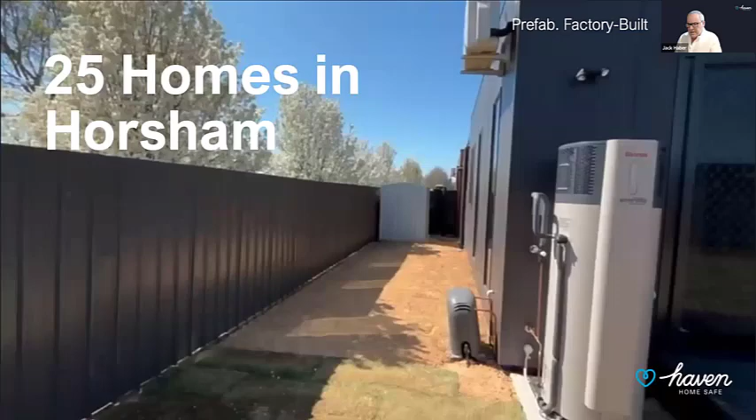We chose prefab for a number of reasons. With a funding commitment and a permitted site, our challenge was procurement. In Horsham, there's really only one local builder in the area with the capability of delivering a 25-house project.

We decided to go to tender and look at the options available to us, which was modular or traditional construction. We went to 3 modular, and 3 traditional builders, and modular won hands down. Tender prices were spread by 28% between the top and the bottom tenderer, or the most expensive and cheapest.

Interestingly, not all manufacturing modular providers are cheaper. Oddly, the most expensive and the cheapest tenderers were both modular. We awarded the contract to ARKIT on price and capability.

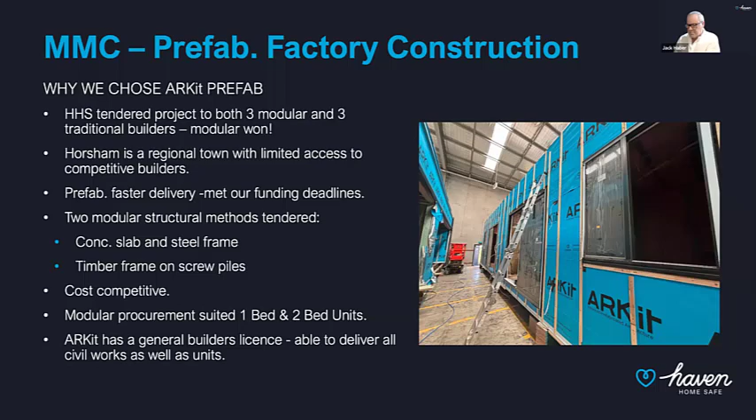So from an ESG value chain perspective, why did we choose modular? And particularly ARKIT, they brought architect design capabilities. They met our ESG requirements with a timber frame solution, and I'll go into this more later on in this presentation, bringing environmental benefits.

Their production methodology enabled them to produce up to 8 modules simultaneously in the factory. And their system was they build in batches, they deliver to site, and then they go on to the next batch.

With the modules fully completed in the factory, one of the issues facing prefab generally is proving to your funding body, whether it's a bank or in our case, a government funder, that you can verify the ownership of all the kit of parts that goes into a modular build. We were able to solve that problem with ARKIT and solve it to the satisfaction of Homes Victoria. So that was very important to us.

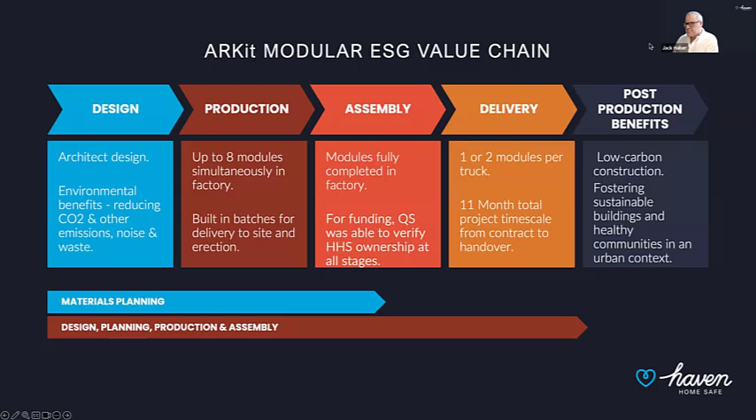So the first is a reduction in overall waste. Waste, as you probably know, is a big problem in construction. And these results demonstrate from a University of New South Wales study of multiple builders, both traditional and modular, that there are significant savings in waste with a modular build.

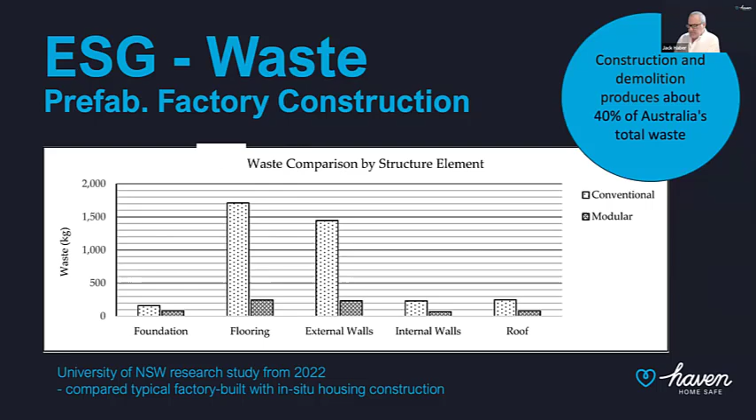The second is the carbon benefit. So a little bit of my perspective on carbon and construction. We're in a world where CO2 emissions are already affecting global economic and human security. With unchecked CO2 emissions driving climate change, the threat is to our national economy and raises the cost globally of disaster response, as we've seen recently, and fuels migration crises and conflicts.

In Australia, a survey in 2023 showed that 71% of Australians to be fairly or very concerned about climate change. But if you go to any pub and ask somebody there, they'll say, no worries, mate, just another day in paradise, because that's the Australian way.

My perspective is that we need to develop a sense of urgency because, as Bill Gates said, it's one of the most urgent and most complex problems the world faces, and we need to act quickly to avoid the worst possible outcomes.

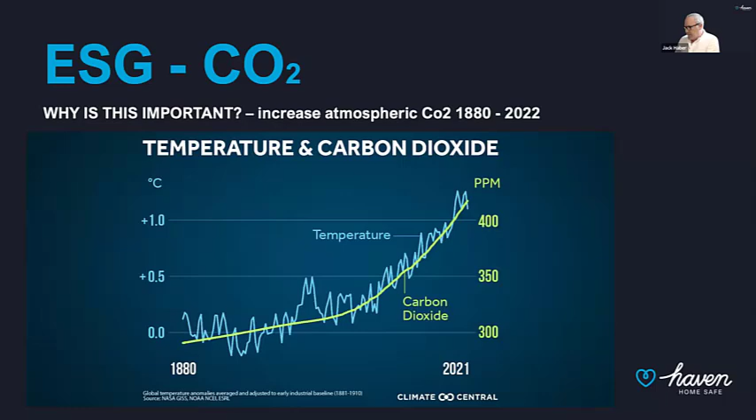In terms of construction and CO2 globally, you can split the construction component of global CO2 emissions into two. There are the operational benefits of the energy use in buildings over the building's lifespan, and there's the energy and emissions involved in the construction of the building itself.

So what's the difference and how does that affect the choices that we make? Well, it's really a time impact. If 11% of emissions from building construction come from embodied carbon, why should we focus on it? And the reason is because of the time frame.

The carbon released into the atmosphere, if you make better materiality choices, you're affecting a time frame within the frame of the construction itself. So it's a direct and immediate benefit environmentally, whereas operational emissions, the oven you choose, the dishwasher you choose, the refrigerator you choose, or the building itself and the insulation and so forth, the building lifespan might be 50 years or more.

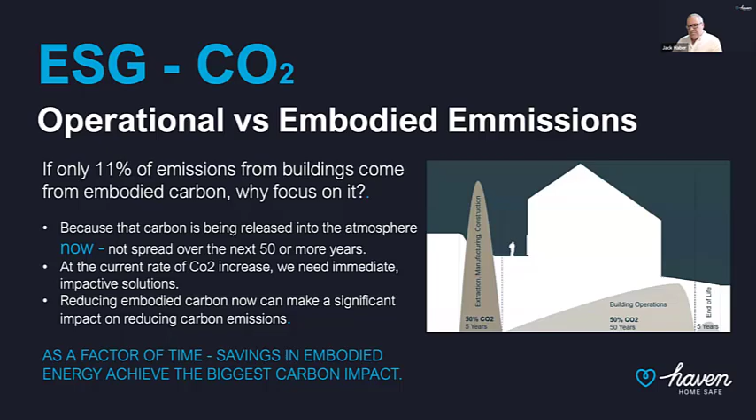So we did a study together with an environmental consultant called Ark Resources. And we basically studied two cases. The as-built design, which was a timber frame modular building on screw piles. And we compared it to one of the other tenderers, which was a waffle slab with steel purlins as the frame.

And what we said to our consultant was, we want you to compare and contrast the two construction systems, frame only. In other words, we've limited it to just the structural frame. Everything else, the cladding, the linings, the flooring, everything else being equal. But how impactful would a timber frame building be against a steel and concrete building in terms of carbon emissions?

And this shows the results. So the second line, the total of a timber frame was 5 times less, 5.5 times less than the carbon impact of a steel and concrete building. And remember, this was just focused on one of our units, one of 25 units.

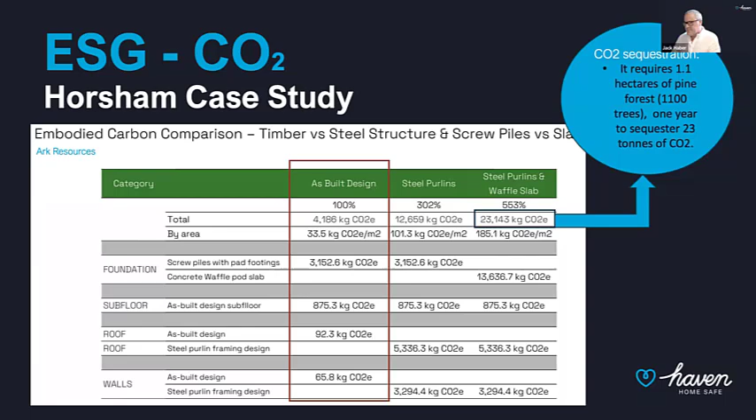So for 25 homes, timber frame on screw piles versus a steel and concrete build, the equivalent carbon differential between the two is 475 round-trip flights between London and New York. It's very significant.

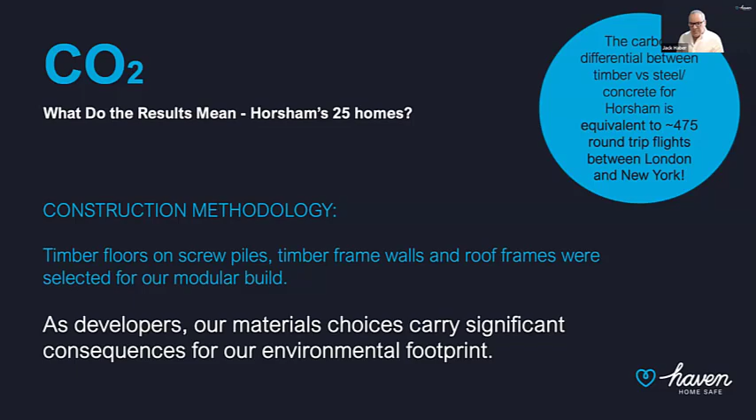My point is that the choices we make as developers, designers, and builders carry very significant consequences to our environmental footprint, and those consequences are encapsulated within a short time frame during the build. If we all made environmentally sustainable choices with embodied emissions, we could have an enormous impact on carbon in our environment.

So talking about timber applications more generally in construction, I believe that compared to other building typologies, Class 1 and Class 2 residential projects, which require relatively short floor spans, mostly between 4 and 6 meters, and relatively low live loads compared to offices or schools, engineered timber structures bring environmental and cost benefits, but they also bring excellent structural benefits, and they're more than capable of coping with a wide variety of housing typologies.

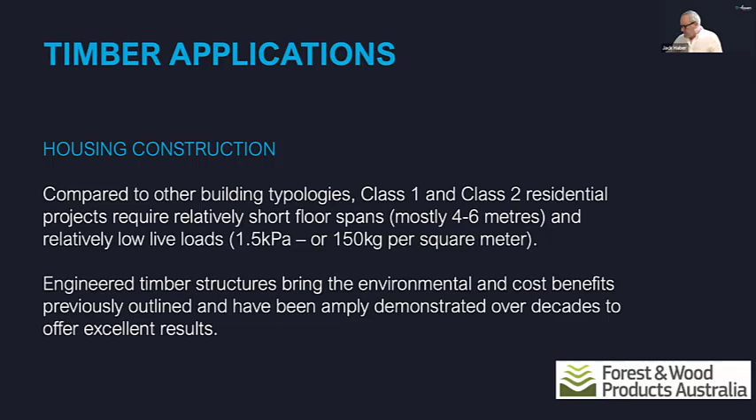So whether it's a vertical extension, timber brings lower weight, which is often what's necessary to create developments in a building's air rights. As an architect, I acknowledge that steel and concrete are essential to many projects, but for residential, whether it's vertical air rights or mid-rise, timber is a sensible and sustainable choice and brings both cost and environmental benefits.

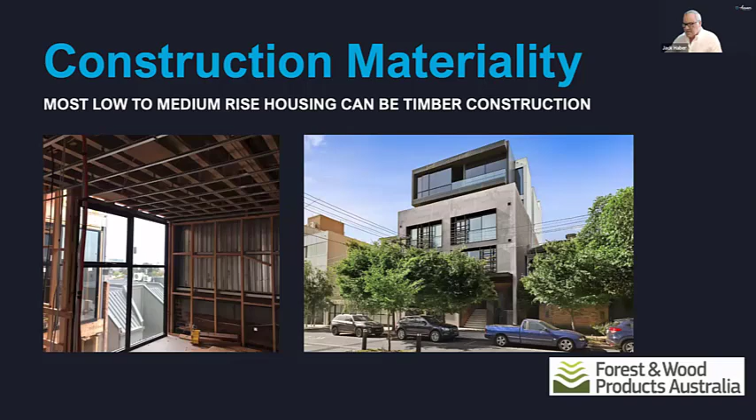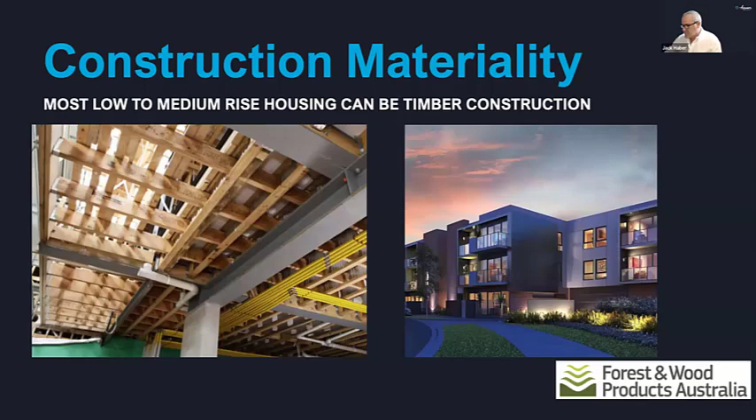Another project — most housing that goes up can and should, in my view, be built in timber. Steel may be required as a structural element, but if one considers a hybrid frame, in most cases the choice of using timber will save tons and tons of carbon and will also save money on most projects. It's an easy choice to make. Timber construction is well understood, well supported and supplied, and it's a choice that we as developers and designers can make that has a real impact.

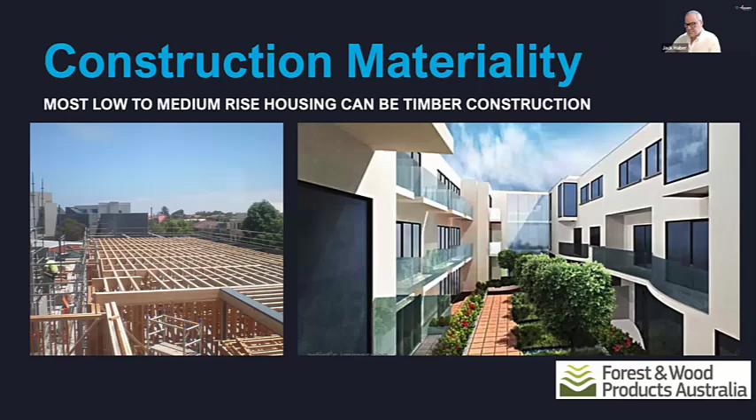Like any construction system, timber requires careful engineering and detailing. For Class 2 buildings in particular, of course, one has to deal with fire, acoustics, cladding and services design. And it's really important, therefore, to have consultants who understand how timber goes together and how to meet all the requirements and get the results that timber can bring.

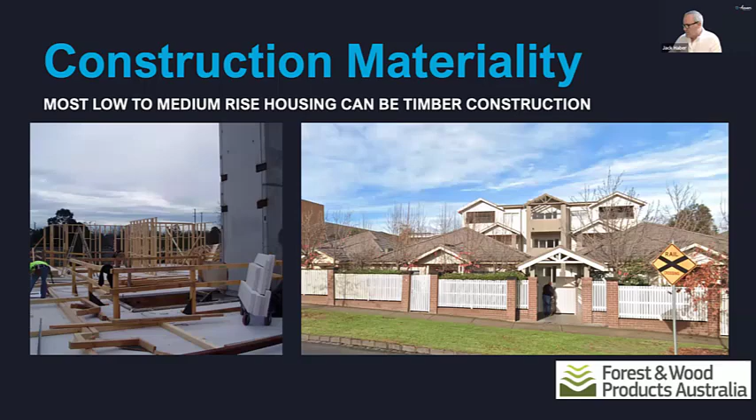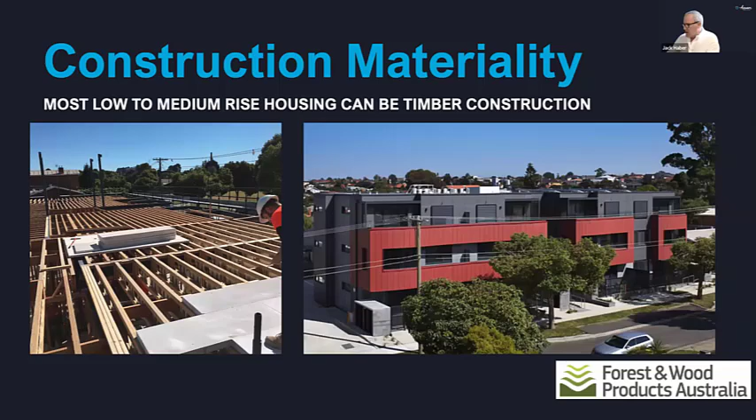But if due consideration is paid to the particular requirements of a timber system, one can achieve highly successful results, often saving time because of the ability for timber to be built in components in a factory and to be brought to site as a kit of parts.

This particular building, for example, was completed in 2014. Interestingly, a lot of opinion surrounds the use of timber in construction, and people often say, well, what about shrinkage? What about water? What about fire? The building's not as valuable or not as sustainable from a usage point of view, an operational point of view, as a concrete building. This particular building proved the lie to those claims.

As a demonstration of the timber structure's long-term value, specific interviews were conducted with the building managers of this building who took over when handover occurred, and the interviews were conducted 10 years after handover. The managers reported better overall performance for the building than many of their concrete frame buildings, with no issues whatsoever with the timber structure. In fact, their on-site managers had no idea that the building had a timber frame.

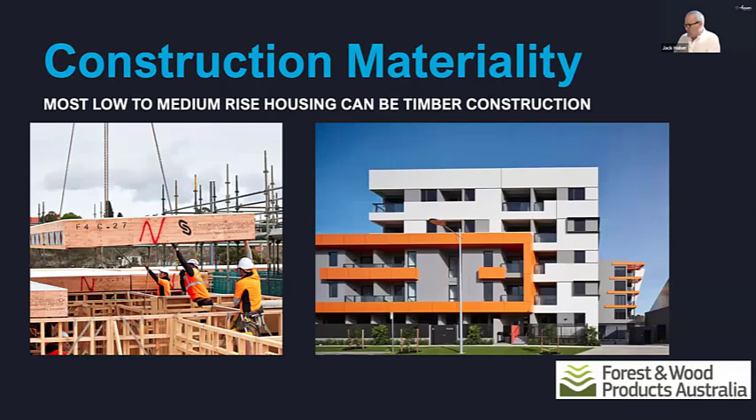So my message to any of you who are designers or developers or builders is that our collective decisions as design and construct professionals can have an enormous potential environmental impact and should be in our list of considerations when we make our materiality choices.

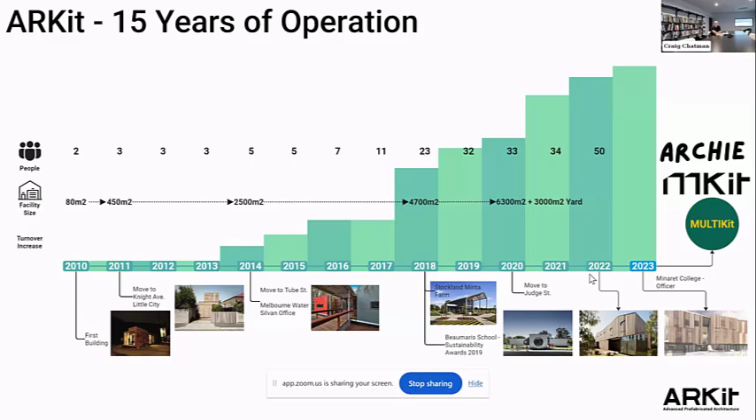Some of the client pool and architects we've worked with—although we are architects and have in-house architects working here—there are important learnings and offerings we can offer others, so we don't exclusively build all of our own projects. These are some of the clients we've worked with, both local and state agencies, as well as community housing providers.

In our manufacturing facility, our workshop and studio, we're based in Sunshine. Anybody here is welcome anytime, and we have our in-house designers as well as people that facilitate the construction, so site managers, project managers, construction managers, as well as full-time carpenters.

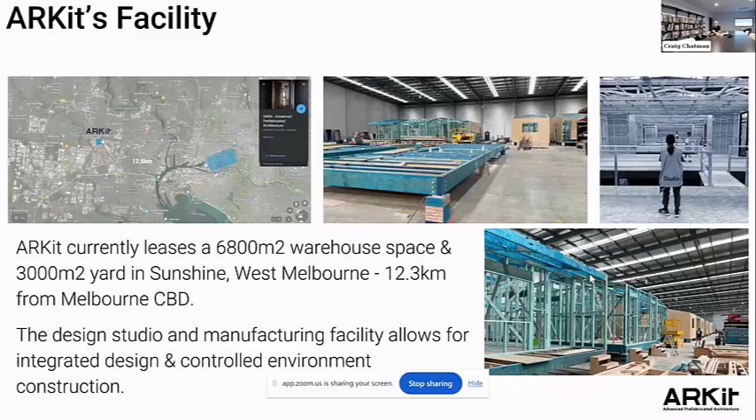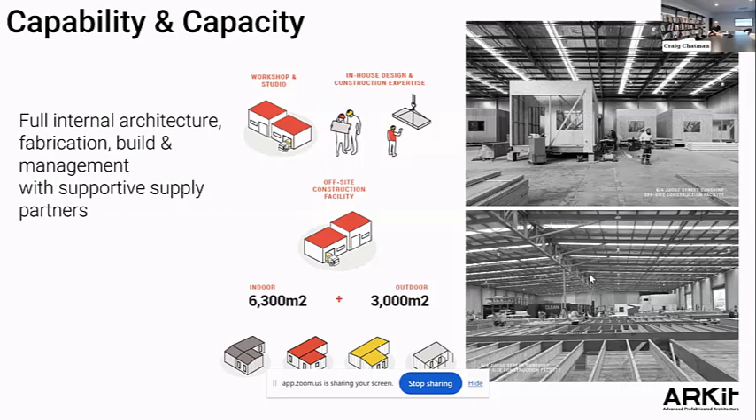So everything gets built off-site in this, our controlled environment. We've got indoor construction activities in every space, and every now and again we do have to rely on a bit of a hard stand to be able to fabricate, but mostly it's indoor off-site construction.

Some of the early benefits are really about combining, particularly for the design and construction company, the services of digital design—a software system and information packages—together with the process behind our manufacturing, that being our QA systems, our DFMA systems and solutions, and the physical product. We're able to manage, fabricate, install and complete our clients' projects to a high level of accuracy and, more importantly, certainty.

The sectors we get involved with—it's very much that housing market, and that's how we started, with one-off bespoke architectural responses. We do design and construct a few passive house projects; we've got one under construction at the moment in Northcote, which is a new build. We still participate in the additions and renovation markets as well as one-off bespoke homes.

Our housing solution that we've evolved: we've got an entity called MultiKit, which looks at that low carbon mid-rise space, and Preset, which is a social and affordable housing space. We've also just developed a solution for secondary dwellings off the back of the relaxing of some town planning requirements, for up to a 60 square metre dwelling as a secondary dwelling.

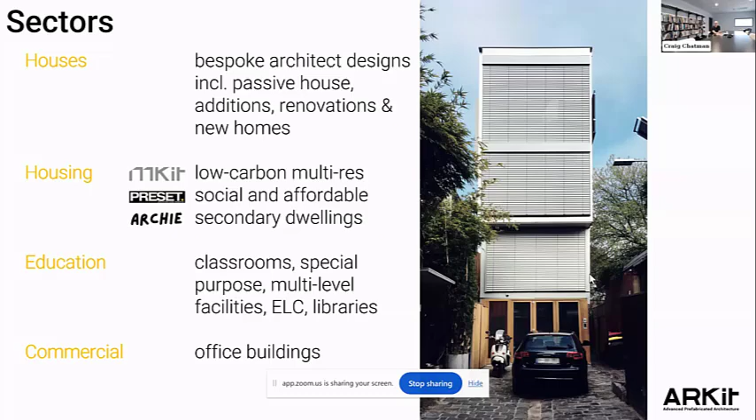We've designed and built quite a few classrooms, early learning centres, libraries, etc. And we also get involved with small-scale office buildings.

The processes behind how we deliver and design, and also manufacture the buildings—there are three general approaches: fully volumetric dwellings, where we complete as much as we possibly can in the factory environment; a panelised approach, which is big, for want of a better term, Lego sections that are again completed off-site; and then a hybrid approach, whereby there's a mix between on-site, fairly conventional activities and also a modular or panelised approach as well.

That project on the right-hand side was a project in Northcote, which was a design response to a heritage overlay, where there needed to be some contextual on-site brickwork and a pitched form, hence the outcome there.

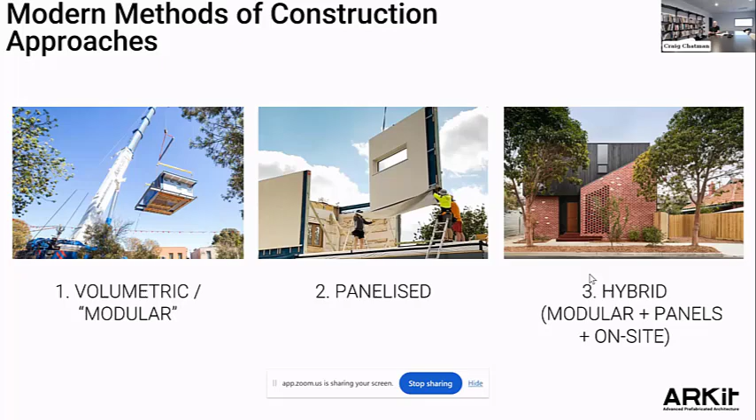Some of the products and projects we've been involved with over the years—as I mentioned, it's evolving. It's quite an exciting space to be in at the moment.

The benefits of modular construction and MMC are really about program efficiencies, as Jack highlighted earlier. There was an 11-month construction program from start to finish with the Horsham project. There's speed, quality of construction, and by removing construction activities from the site and placing them into our controlled factory environment, there's a proven positive impact on safety, efficiencies, and quality behind the build. This slide also demonstrates the decoupling of concurrent construction, what can happen on site versus in the factory environment, so you get an overlap of construction activities happening at the same time.

Reinforcing Jack's earlier slide about waste, there's a big benefit with construction waste, particularly in timber construction. Construction waste as a whole accounts for 40% of landfill, and timber prefab greatly reduces this. We undertook an independent assessment of our project recently, which confirmed that approximately 3% of all waste material went back into landfill, with the balance being recycled.

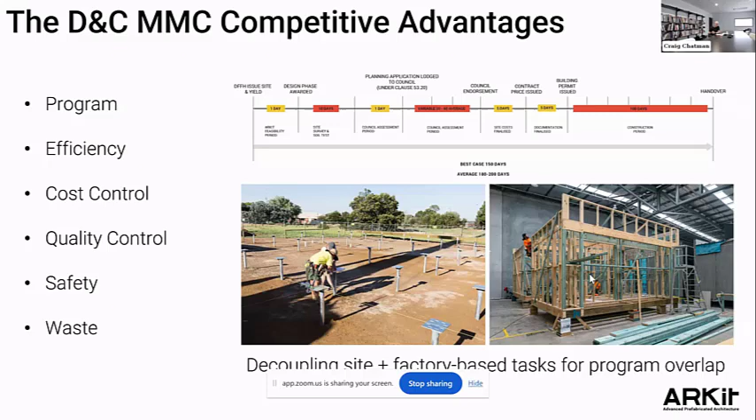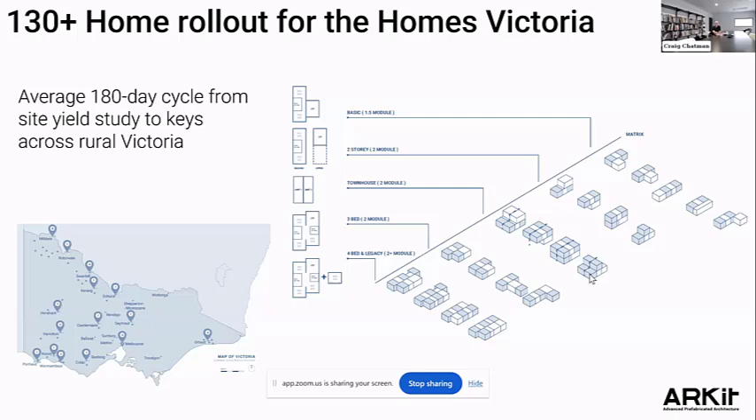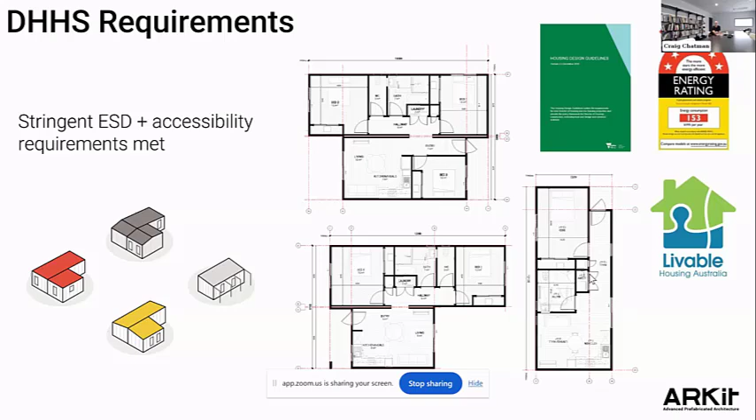As a precursor to the Horsham project, we've delivered about 130 houses over the last 4 to 5 years for Homes Victoria, establishing a few different typologies. There's been a suite of 1 up to 4 bedroom homes, but the emphasis has really been on 1 to 3 bedrooms delivered for Homes Victoria throughout the state. This enabled us to offer design solutions that fully comply with Homes Vic's overlay specification requirements at the time under the previous NCC, National Construction Code. All of these houses needed to comply with a 7-star energy rating, as opposed to the 6-star requirement at the time, and achieve a gold standard under the livable housing guidelines. We've had this suite of designs delivered over the last 4 to 5 years.

It's been a great precursor to the Horsham Haven Home Safe project. There were 25 dwellings, with an existing town planning permit in place that we inherited after the tender was awarded. There were some additional objectives we needed to put into the project, as Haven had their own requirements regarding compliance to livable housing guidelines and the silver standard, which the original design wasn't built to, so we had to take that information and adopt it.

As well as being a modular solution, the original design was a concrete slab on ground, but we needed to elevate that slightly to allow for the subfloor construction. This meant we needed to maintain stepless entries between the car parking spaces and the dwellings, and the design actually lent itself quite well to raising the building up. We were able to have a ramp from the car park areas back up into the dwellings to maintain this stepless entrance approach, as well as some internal readjustments and value management options.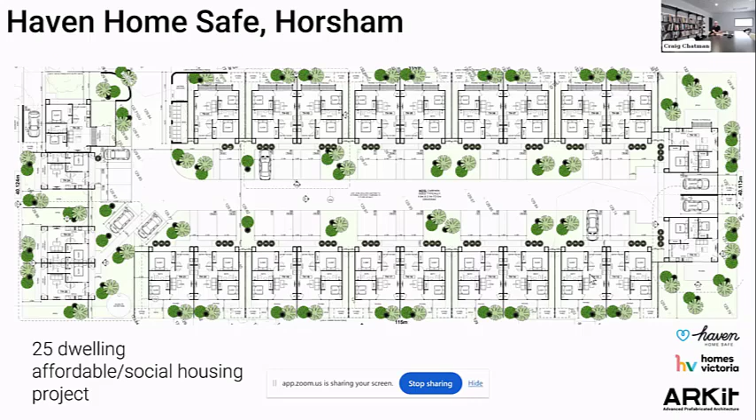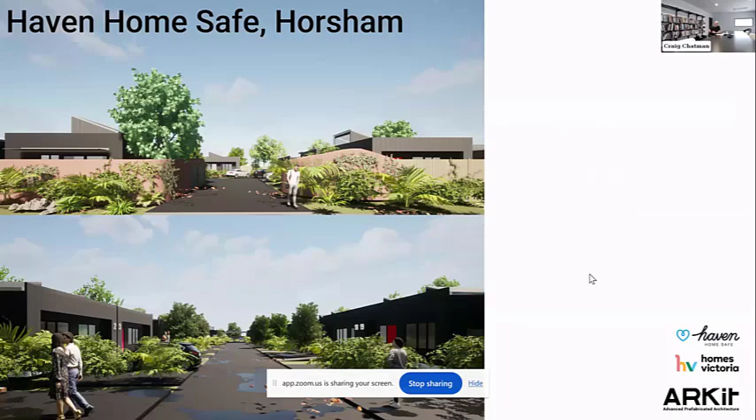We provided the external cladding. Some earlier perspectives of the project included an idea, which we inherited but worked with and embellished, about a central driveway that was quite open and public to pedestrians and occupants—the car park area and walkway areas—offset against more secluded private open spaces at the rear of the dwellings.

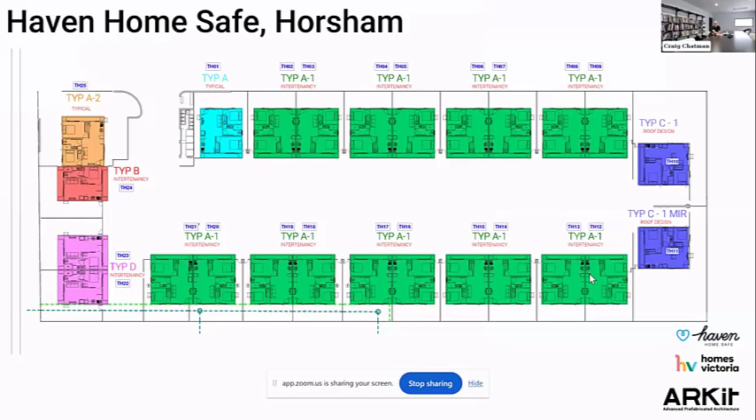With modular construction, what we try to maintain is the design integrity, working with our architectural team to maintain that, and then understanding the fundamentals of what we can deliver to the site and how we'll approach the prefab or offsite construction solution. This is an early diagram illustrating how we develop typologies and building types, then break this apart into various building elements to deliver to site.

There's an understanding on every one of our sites that an assessment is done early on to understand what we can deliver, given this project was modular construction. This doesn't apply to our panelised approach, but given the constraints of the site in Horsham, it was better for us to deliver these as a modular build, and the design very much lent itself to that. But there are some physical constraints, like the sizes of what you can put on the back of a truck.

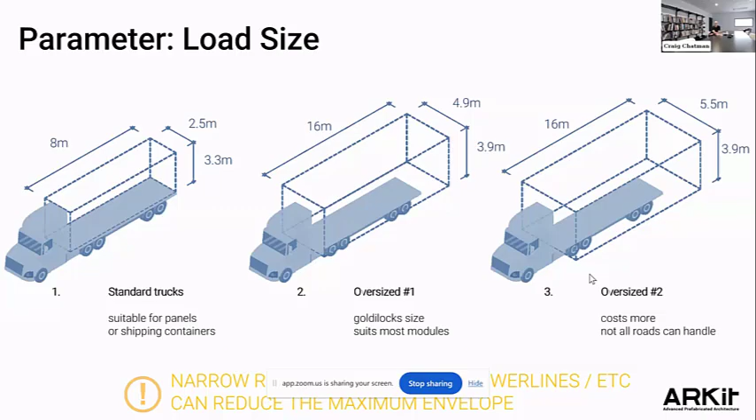This was more or less a development of those ideas and how we would build the buildings. This is an early documentation drawing. Early on, we made the assessment that we were going to deliver this over 3 tranches of about 8 dwellings each. On the far right-hand side of this diagram, those were the first buildings that we delivered.

Whilst we were building the second tranche, or finishing it off in our workshop in Sunshine, we were able to start the landscaping. The civil works were all complete, but the driveway works, car parking, ramps etc. still needed doing. So there was this idea of ongoing concurrent construction between off-site and on-site.

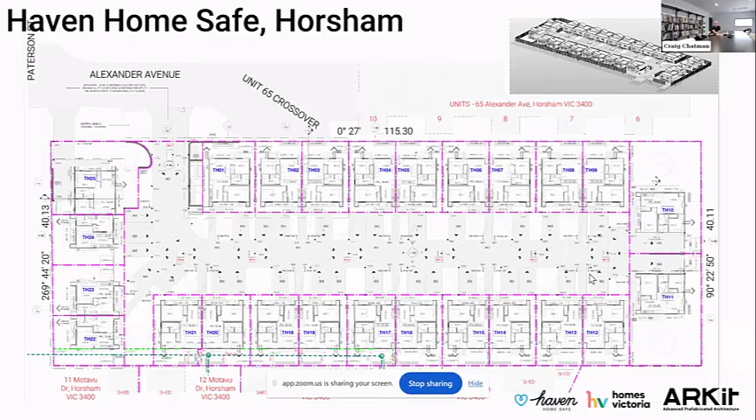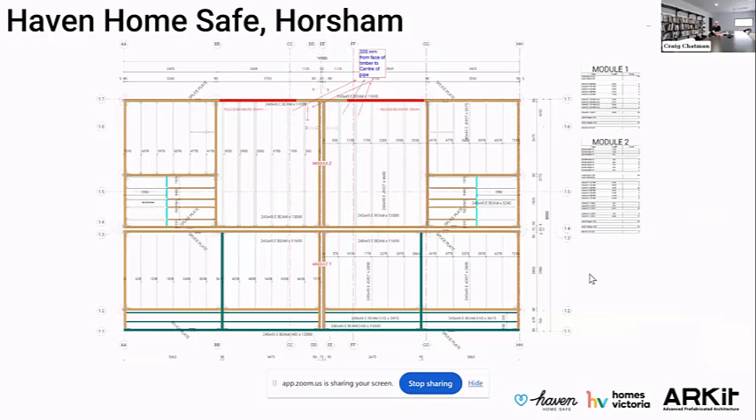There's a big emphasis in what we do in our shop drawing world. A lot of time and energy is spent on this because it's a critical part of being able to manufacture our buildings. What that really means is we minimise any clashes, mapping everything out in the BIM world to make sure it's very efficient in construction and everything's considered.

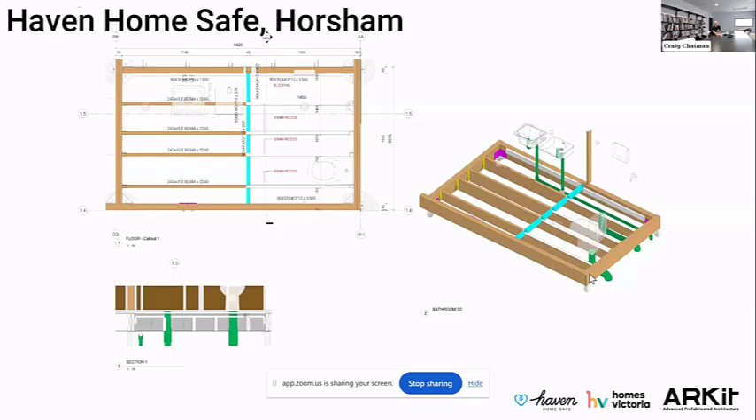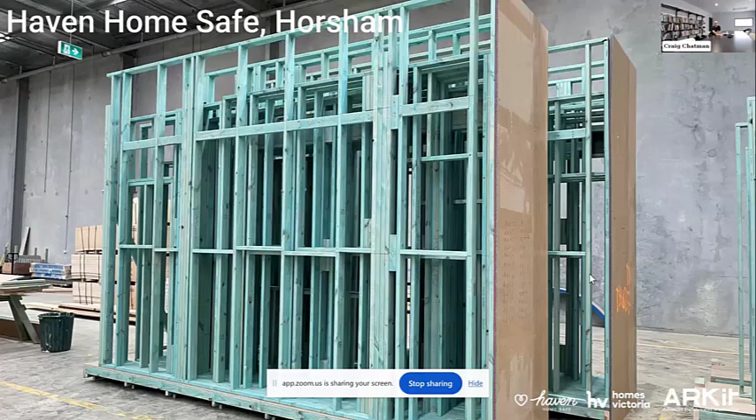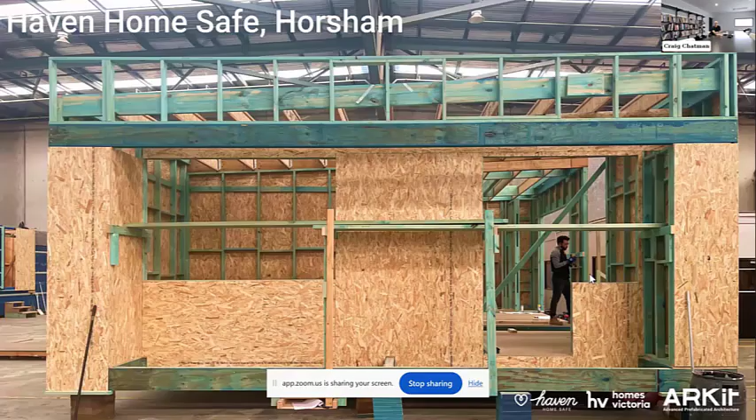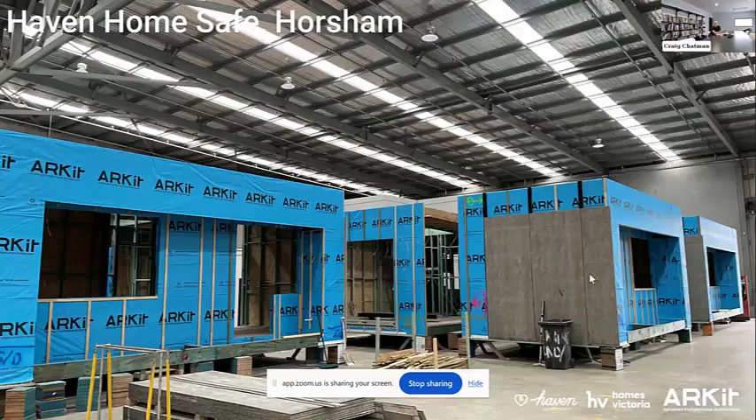So there's just a couple of short diagrams to illustrate that, and some happy snaps of the project under construction. This is the beginning of a few bases of subframes going together, and some sections of walls being built concurrently. The idea is that these are built at the same time as the wall frames. Some assembly of both components comes together, mixed in with the roof design. A few more action shots of it all coming together, and a series of buildings together, with the external cladding being finalised before they make their way onto the back of a truck.

These were interesting objects. They really assisted with the performance of the buildings, particularly with daylight, given the orientation of some of these dwellings. Each one of these pop-up roof elements faced north, so despite the orientation of some buildings, there was a good abundance of natural daylight coming in through these pop-up roofs. Quite a lot of time was spent making sure the overlap, or the male-female junction between these pop-up roofs and the top of the single level building, was designed so it could be seamlessly installed on site.

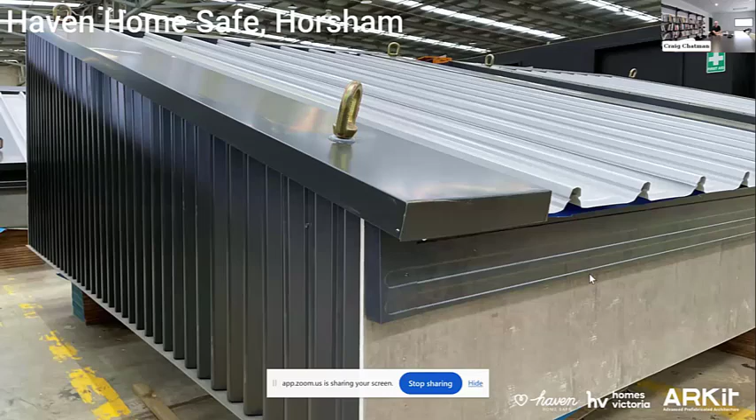And these are just details of the pre-plumbed, pre-finished roofing and the lifting lugs that enable them to be installed.

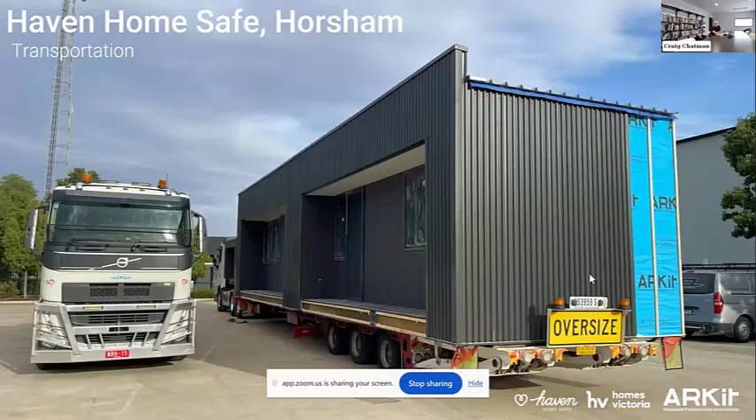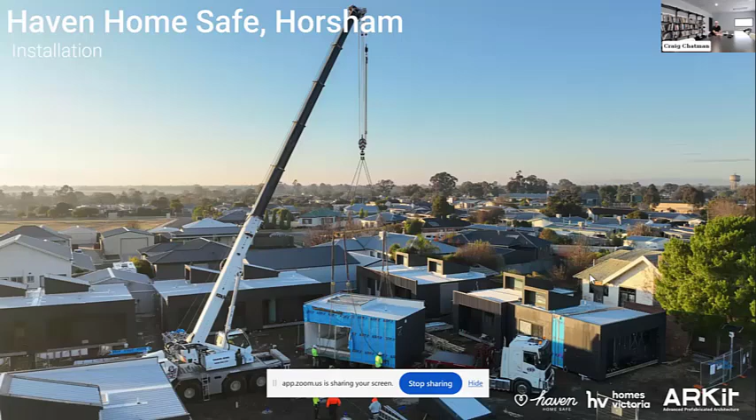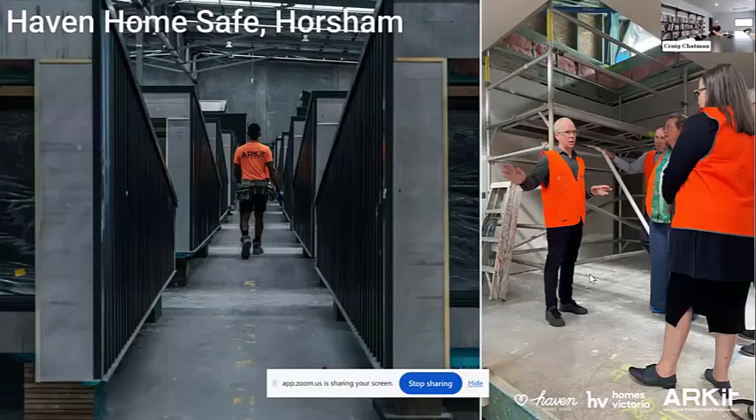So it was a great site to work on. It was very accessible, which is amazing, and that's sometimes why we need to panelise our projects if we can't get big cranes and big trucks to a particular site. But this was a good project from an accessibility point of view.

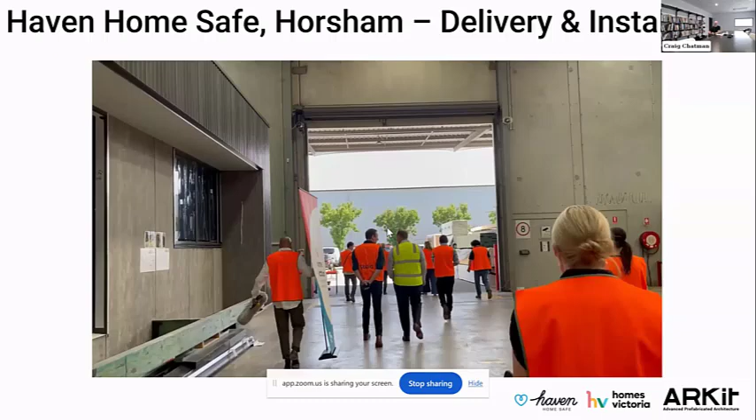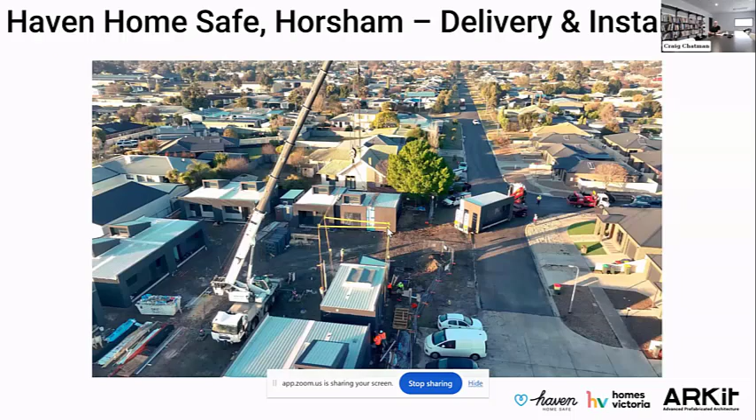Short video. So we had a great media day. Homes Victoria were there with the local member and also Harriet Shing, the Minister of Housing, and they came out to actually see our facility and the building under construction, which was great. Just some of the final stages of a few of the modules being installed, and a bit more of the finished product.

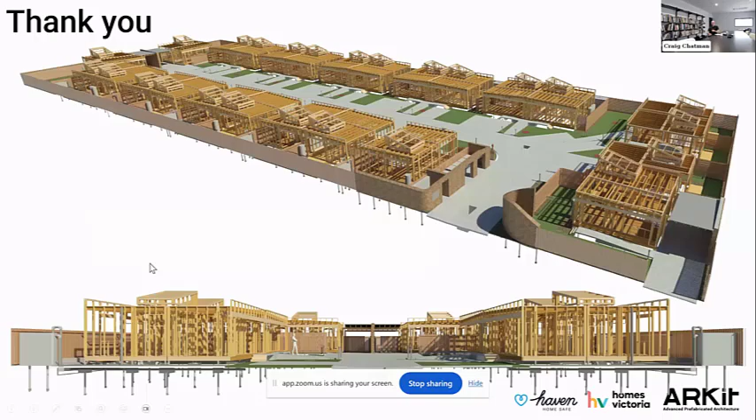And then just finishing with some of one of our BIM models, highlighting some of the amazing timber work that went into it.

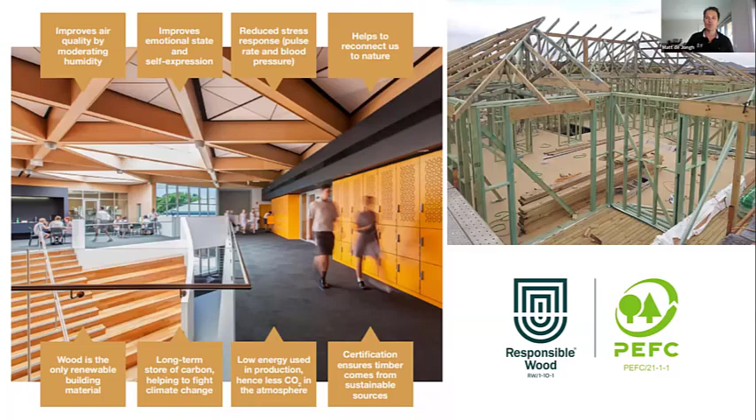The big thing I want to talk about today is how forest certification ensures that wood and timber has come from sustainably managed forests that actually remain forests. I mentioned at the start that Responsible Wood is a standards development organisation - we write and develop standards. We have two: one for sustainable forest management, covering the 17 million hectares of forest in Australia and New Zealand certified by Responsible Wood.

Unfortunately there's quite a bit of misinformation around certified sustainable forestry and deforestation. Forest certification was established about 25 to 30 years ago as a means to actually halt deforestation. The trees must regrow and regenerate. Deforestation is where there's a permanent land use change - for example, where a forest is cleared for some other permanent land use like agriculture or urban expansion.

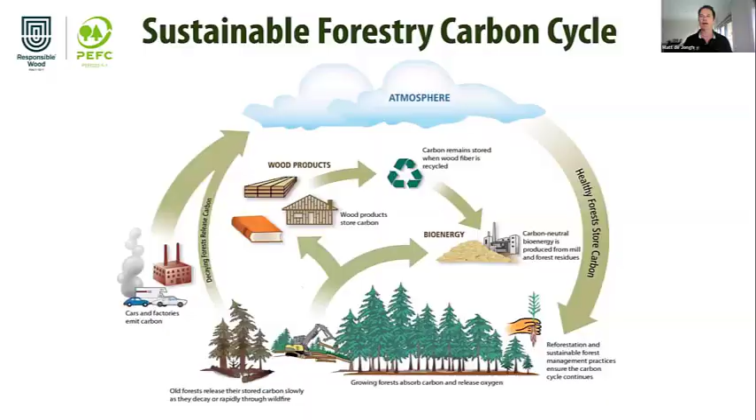So by using forest wood-based products, whether paper or timber, you are absolutely supporting mitigating climate change. It's a really good thing for the environment, and it's part of the whole circular economy. As defined by the United Nations, the circular economy is basically a system that emphasises the reuse of products instead of discarding them and extracting new resources. So certified sustainable forestry is absolutely part of the circular bioeconomy.

We've heard a bit of talk today about the environmental, social, and governance aspects as well. From an environmental perspective we've talked quite a bit about that. From a social perspective, under the Responsible Wood standards, there's quite a bit of stakeholder engagement, and the forest manager must demonstrate that they maintain and enhance cultural heritage values. From a governance perspective, our standards align with the ISO, the International Standards Organisation standards, and also the Montreal Process Criteria and Indicators, the globally accepted indicators for sustainable forest management. We work closely with many organisations trying to enhance their ESG reporting.

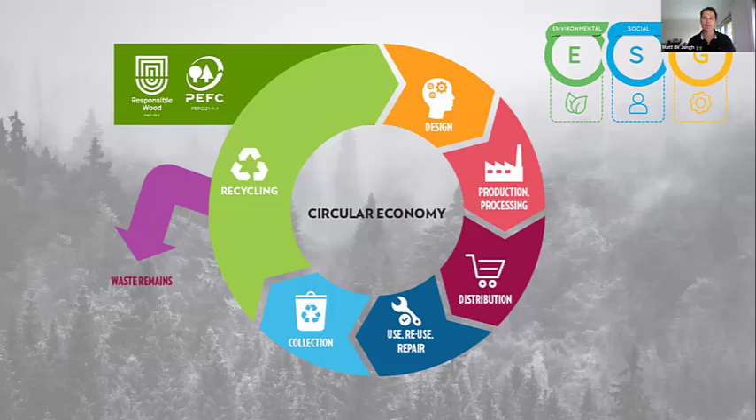So basically, what forest certification does is go over and above the legislative and regulatory environment that governs forestry, particularly in Australia, where forestry has very strict legislation and regulations.

Thank you very much. Thanks, everyone.